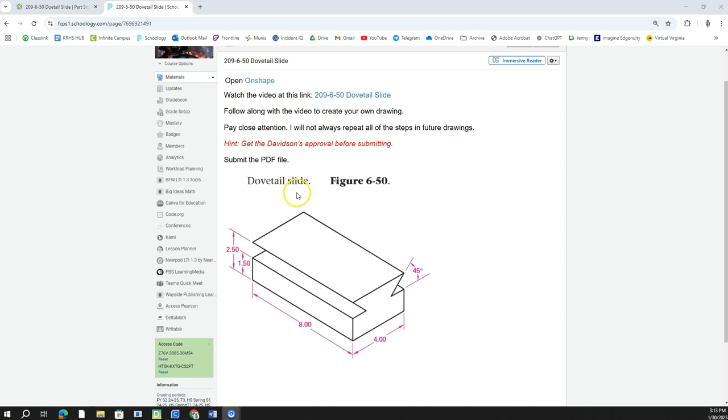I got to quickly work on 209-6-50 dovetail slide. This is the video you're watching, and we're going to make this part. It's an 8-inch long piece, 4 inches wide, with a 45-degree cutout. The bottom part is 1.5, but the total height is 2.5. All right, this shouldn't be too difficult. So we're going to start.

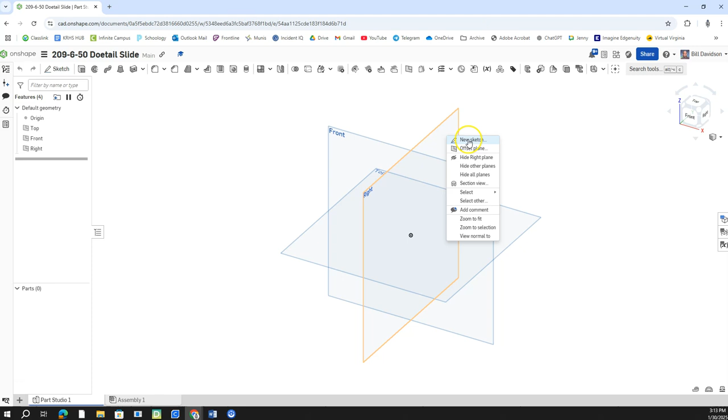I'm going to start by right-clicking on the right side, the right plane, and we'll get going there. Then I'm going to just kind of sketch first. So you always sketch constrained dimension. I'm going to start by just kind of drawing what I think is going to happen here.

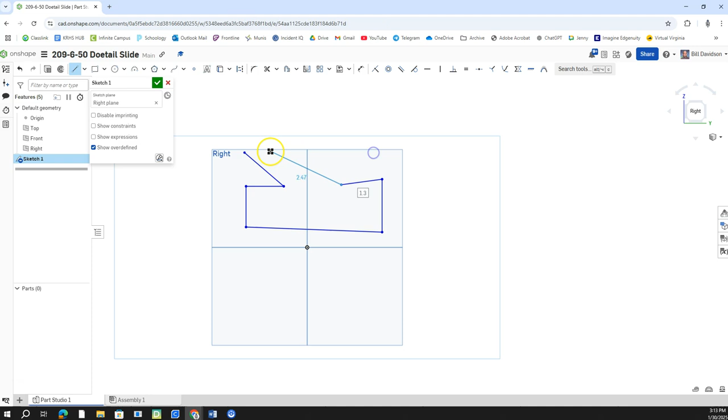Oops, I really messed that up. That's okay. We'll try to get that right. So my constraints are off.

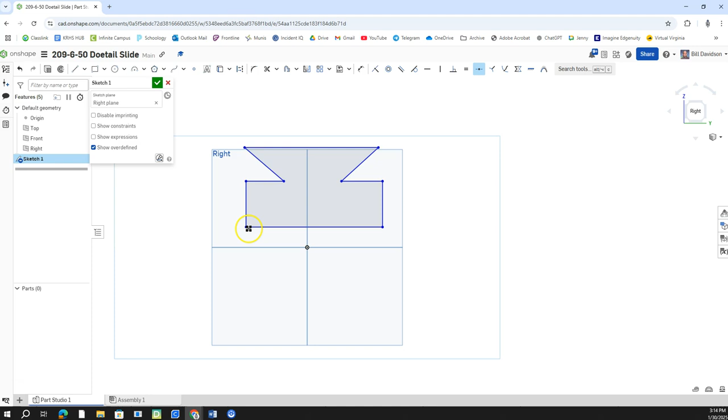I'm going to just go ahead and do a horizontal constraint there. I'll do a horizontal constraint here, horizontal constraint there, and make sure that's horizontal. I'm going to horizontally constrain these two together so they're always on the same plane. I'm going to do the midpoint right here. I'll go from here to, and then select these two to get the midpoint down there. I'm going to vertically constrain this and this and this and this, so that gets that worked out.

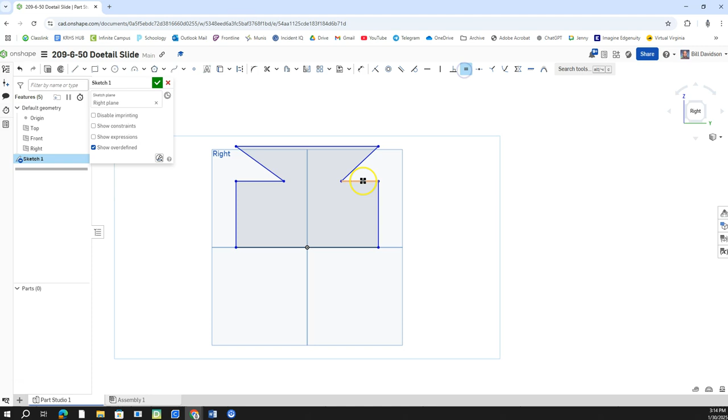All right, so then we'll start putting dimensions on here. Actually, one more constraint. I want to constrain that these two are equal to one another, and I want to constrain that these two are equal to each other there.

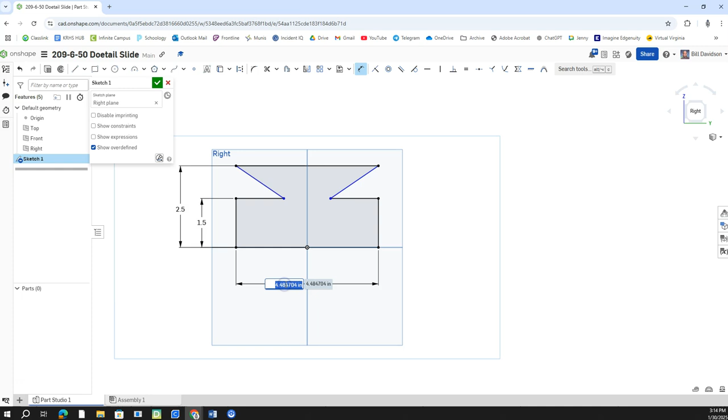All right, so I'll put dimensions on. This one, as I remember off the top of my head, was 1.5 from here up to here. The total thing was 2.5. My entire width of this part was 4 inches, and the angle between these two was 45 degrees.

So that finished that sketch, and we're going to click on this to extrude it. It doesn't matter which direction you extrude it. I'll go back the other way, click that, change that to 8, come out here, so I got an 8-inch piece. Check that. That's my part.

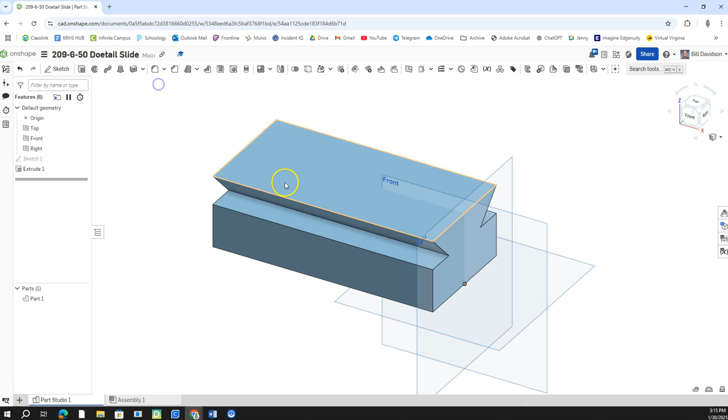Right click with the mouse, go to create a drawing, and I'm going to click ANSI B inch, do 4 views, and kind of go from there.

All right. When that comes up here, there isn't going to be too much, except I'm going to right click here, and I want to show my hidden lines. You won't see hidden lines on these views. You can click them if you want.

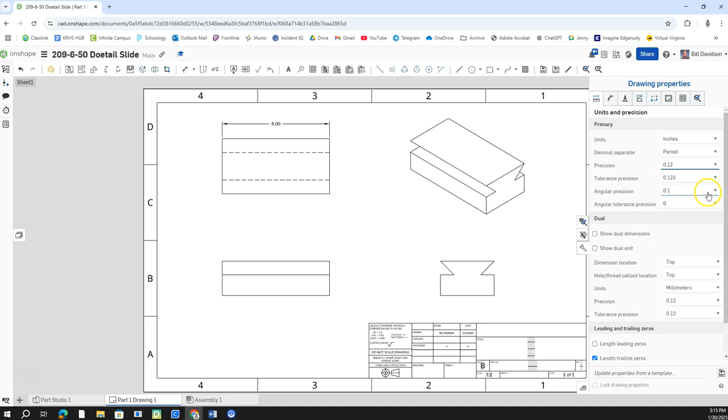But we're going to go ahead and add the dimensions to it now. So I'm going to put a dimension on that tells me the overall length of this part. Oops, I want to change this to 2 decimal places, and I'm going to change my angular precision to just no decimal places. So when I do that, I want to come in here and put this in, that in right there. It's just 45 degrees. Okay, so we got our overall length.

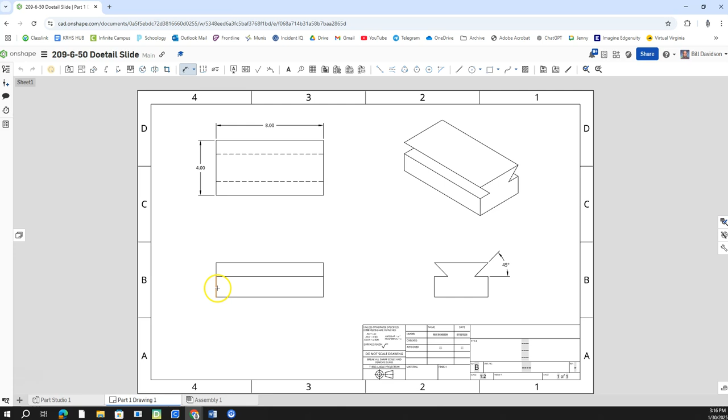I'm going to get my overall width here, right there, 4 inches. I'll get my overall height on this from here to here is 2.5. I'm going to do this dimension over here on this one that says it's 1.5. That is it. We're done.

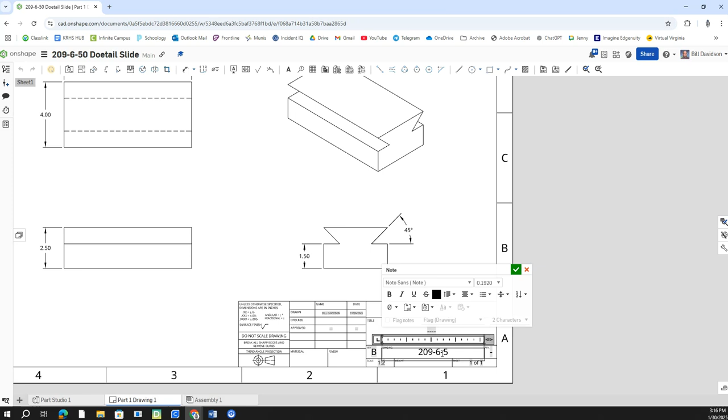So I'm going to come down here, double click on this, backspace over that, and we will call this the dovetail slide, click on that, backspace, and we're going to get the part number, which is 209-6-50. All right. Double click your mouse wheel, and I don't like where that is.

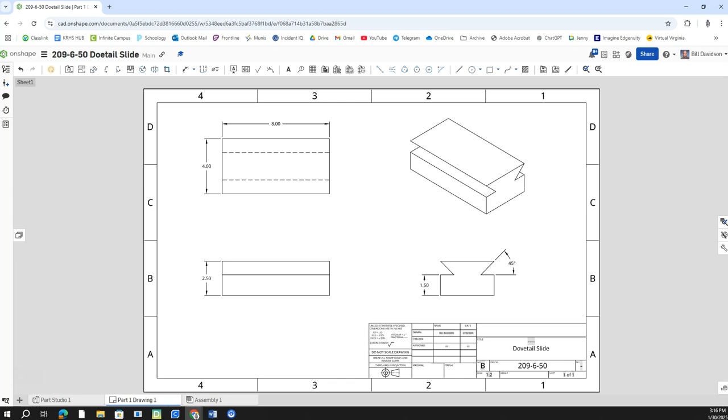I'm going to change that, but you don't have to. You should be done. You can move on. Backspace, dovetail slide. You could have left it right there if you wanted, or do it at the top, whatever it is. Doesn't have to be, so as long as it's in there. Click submit right up there and go.